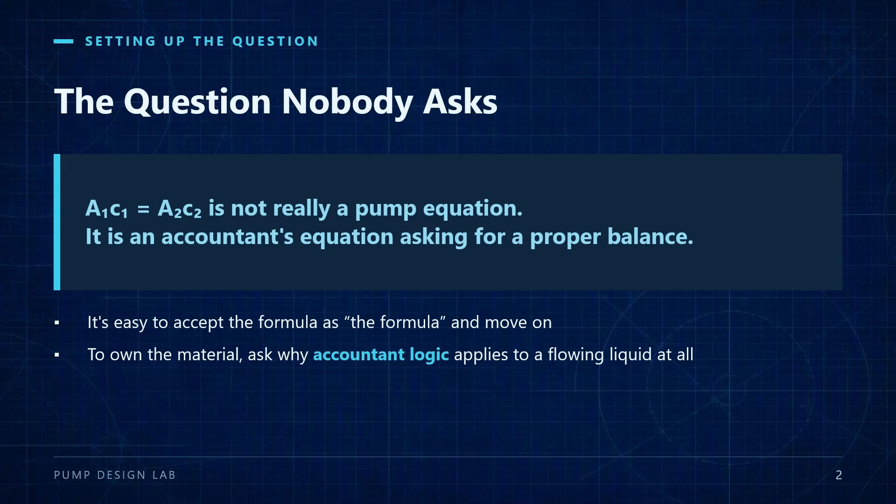It's just a neat way of saying whatever goes into this box must come back out, properly counted. To really own this material, you have to take one step back. You have to understand why accountant logic applies to a flowing liquid in the first place, because fluids don't obey rules just because someone printed them in a textbook.

The ancient rule behind everything. Fluids obey rules because of something much older and much simpler. In this universe, nothing is allowed to simply appear or disappear—not matter, not energy, not motion. If something shows up somewhere, it had to come from somewhere else. If something vanishes from one place, it has to show up somewhere else, maybe in a different form. That's it. That's the core idea behind all of our conservation laws.

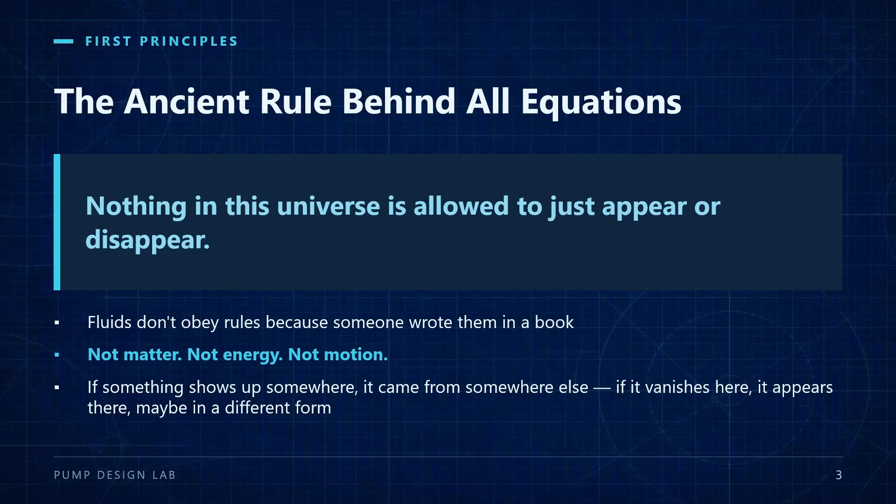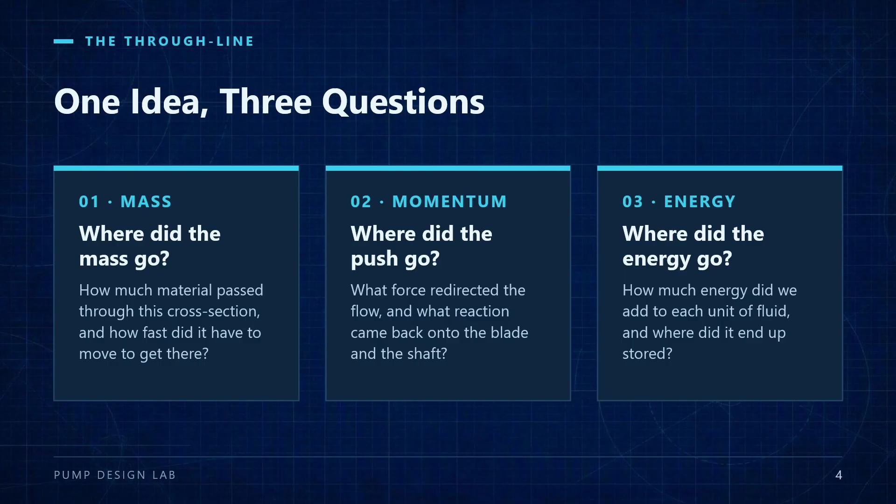Once that idea is really inside your head, the three equations stop feeling like three separate topics. They become the same idea asked three different ways: where did the mass go, where did the push go, where did the energy go? In this episode, we'll walk through each of those questions properly, the way you would explain it to a curious junior engineer sitting at your desk.

Conservation of mass: your gut already knows it. Let's start with the simplest one. Conservation of mass is a law your gut already understands, even if you never called it by name.

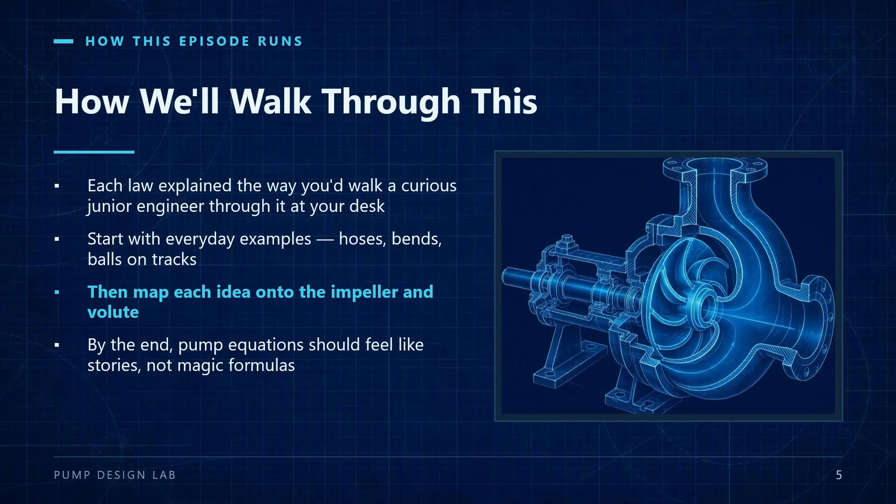Imagine you're standing in the garden with a hose. You put your thumb partly over the opening. Immediately, the water jets out faster. Everyone has seen this since childhood. Very few people stop to ask why it speeds up.

Here's the reason: the amount of water leaving that small gap every second has to equal the amount of water arriving from the tap every second. There's no extra room inside the hose for water to pile up and wait. So when you shrink the exit area, the only way to keep the same amount of water per second is for the water to move faster through the smaller opening.

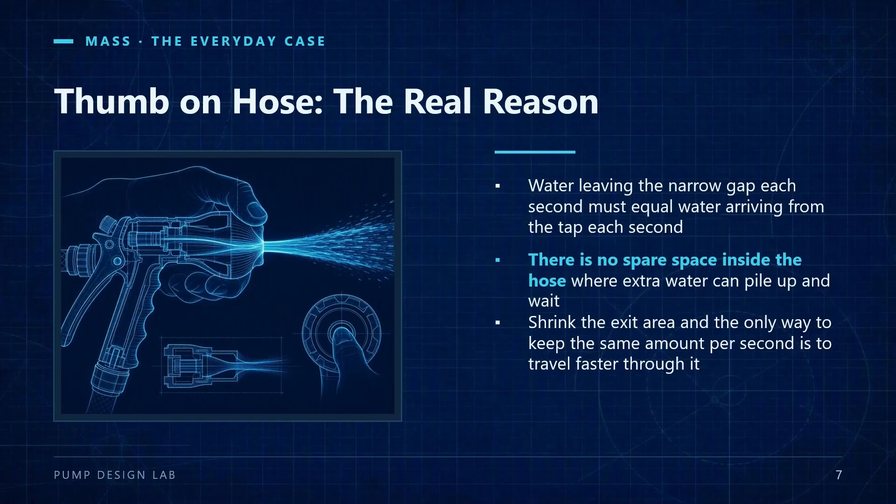That single observation is the entire continuity equation in everyday language: area shrinks, velocity must rise to keep the flow rate constant. It's not some mystical formula. It's just a fluid version of counting buckets per second.

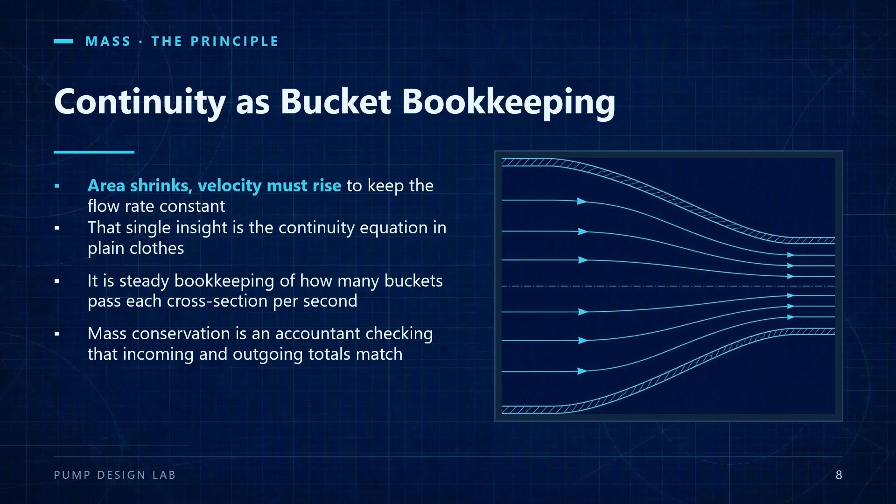Mass conservation inside the impeller. Now take that same idea into a centrifugal pump. Fluid enters the impeller through a relatively large area. From there, it flows into narrower, twisting passages between the blades as it moves outward toward the volute. At every cross-section on that journey, the same rule applies: whatever the area is at that station, the velocity must adjust so that the volumetric flow rate stays the same from section to section.

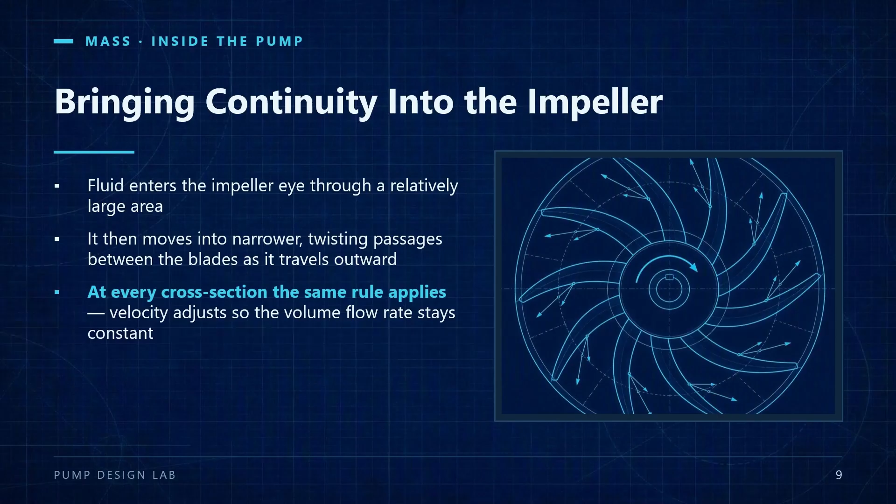For liquids like water, the density is almost constant, so mass flow rate is simply density times area times velocity. For steady, incompressible flow, that product has to be the same at each station. This is why, when you design or analyze an impeller, the very first thing you compute at each radius is velocity from geometry. Before blade angles, before lift or head, you let mass conservation and the passage area tell you how fast the fluid must move there.

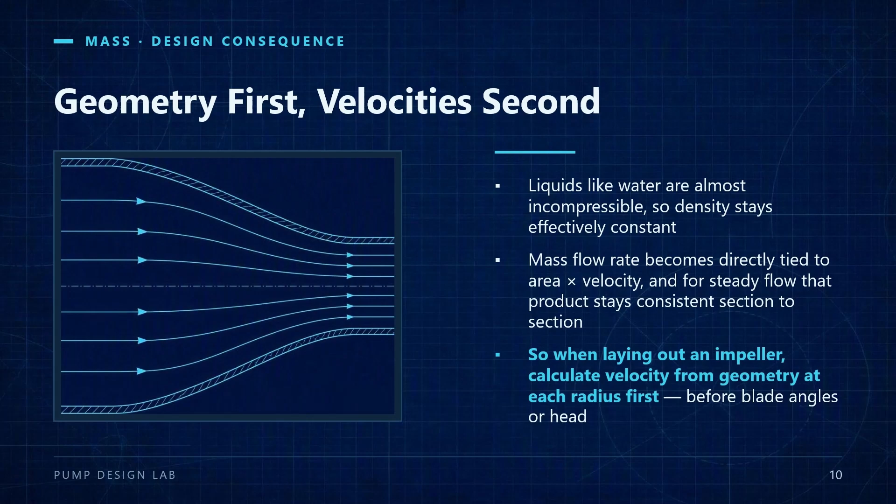Mass conservation doesn't care how hard the blades push or how much head the pump produces. It only asks one question: with this much space available right here, how fast does the fluid have to move to get through?

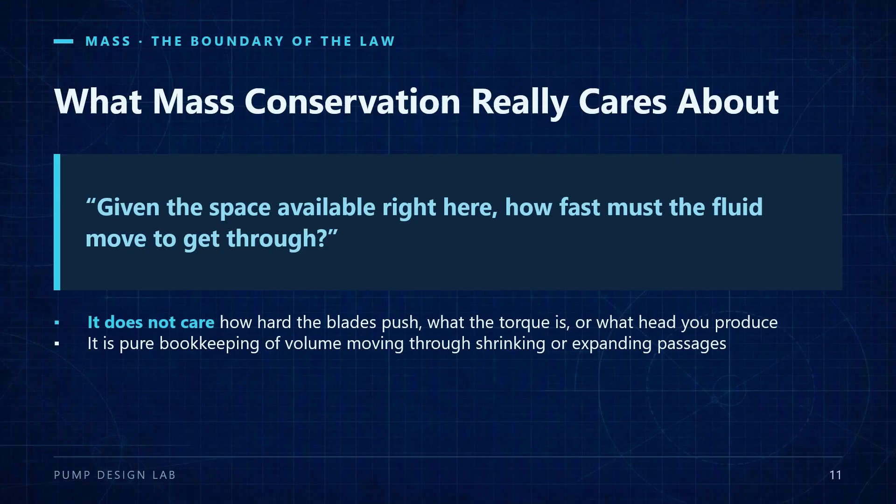Conservation of momentum, where the story gets interesting. Now let's move to conservation of momentum. This is a law most engineers have seen on paper, but often don't feel in their bones.

So we'll build the feeling first. Go back to the hose, but change the situation. This time, bend the hose into an L shape. Turn the water on. You'll notice the hose kicks, tries to straighten, and wants to twist in your hand.

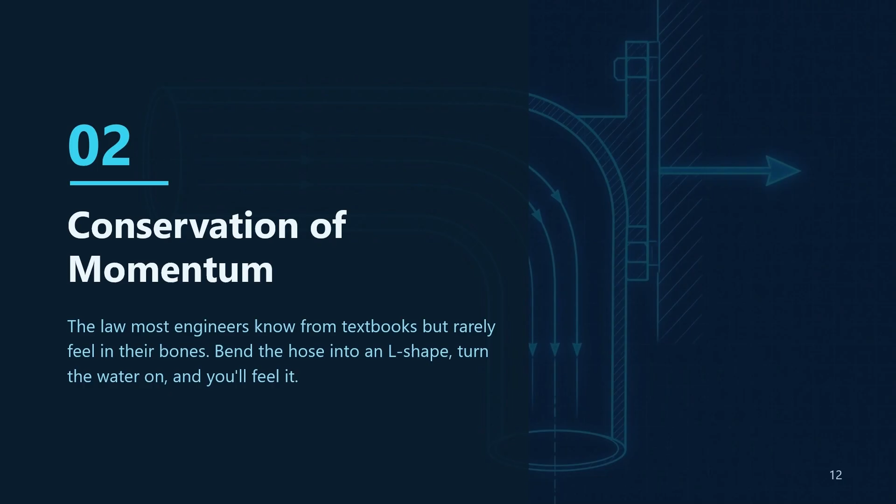Why? The water was traveling in a straight line. The bend forces it to suddenly travel in a different direction. But water doesn't change direction for free, any more than a car mysteriously swerves without a steering input. Something has to push it sideways to make that turn happen. In this case, the pipe wall is doing the pushing. The wall shoves the moving water sideways, forcing it around the bend instead of letting it continue straight.

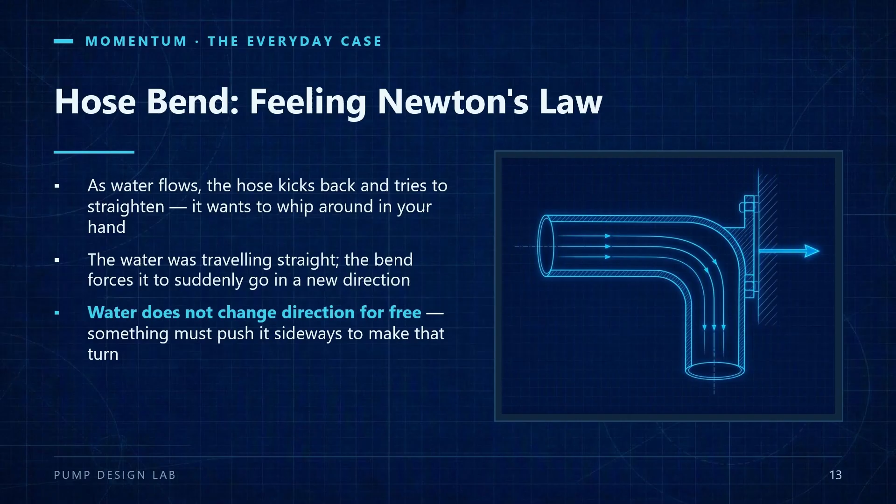And here is Newton hiding in plain sight. If the pipe pushes on the water to bend it, the water pushes back on the pipe just as hard in the opposite direction. That reaction is the kick you feel, not a vague idea of pressure, but a direct physical response to the water's momentum being forced into a new direction.

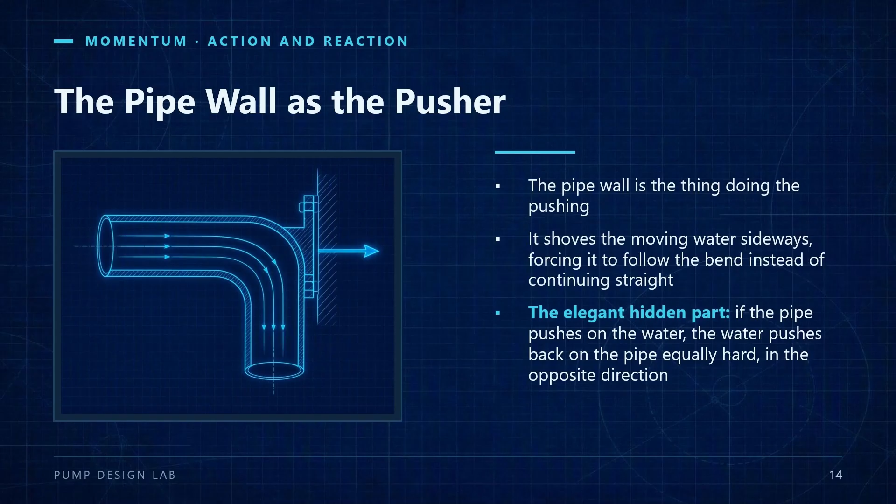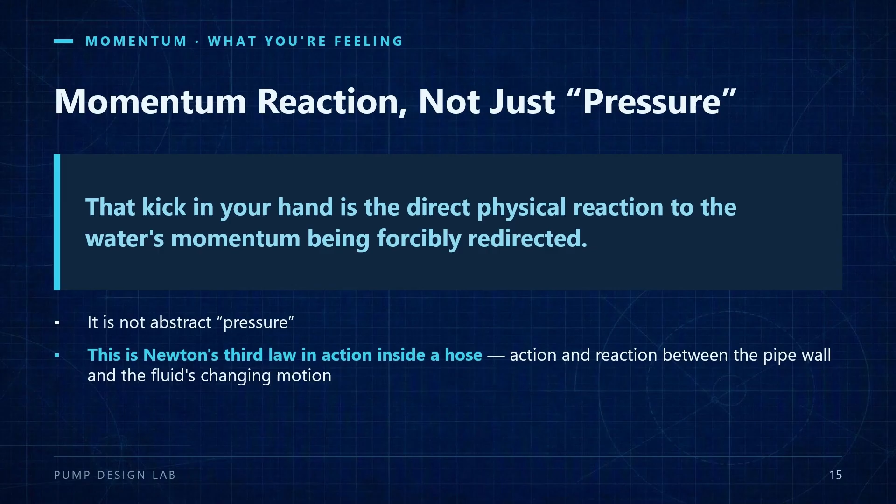Impeller blades as controlled bend. Now hold that picture in your mind and look at an impeller blade. An impeller passage is doing exactly what that pipe bend does, but on purpose, at high speed, and continuously. Fluid enters the blade passage with one relative velocity and angle. We often call that W1. The curved blade surface forces the fluid to leave with a different relative velocity and angle, W2.

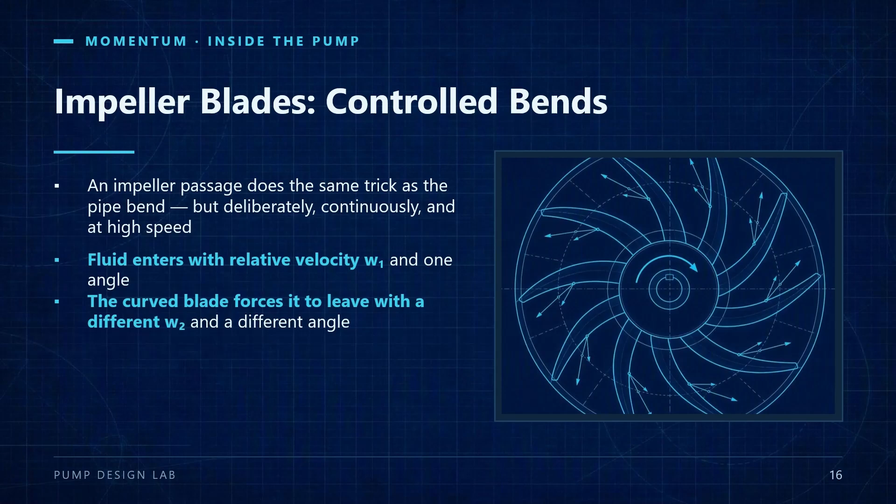To make that change happen, the blade has to push on the fluid, just like the L bend had to push on the water. And again, Newton's third law shows up. The fluid pushes back on the blade with equal and opposite force. That reaction force, acting at the blade radius, creates a torque about the shaft. Torque, combined with rotational speed, is shaft power.

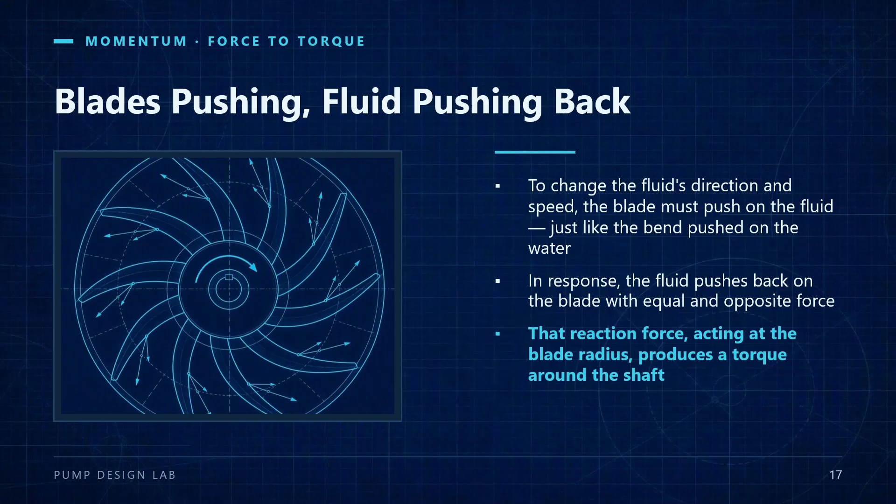So the motor isn't fighting some mysterious resistance. It is fighting the reaction force of billions of tiny fluid particles being bent and accelerated by the blades every single rotation. Conservation of momentum is what connects how we turned and sped up the flow inside the impeller to how much torque and power the shaft must deliver.

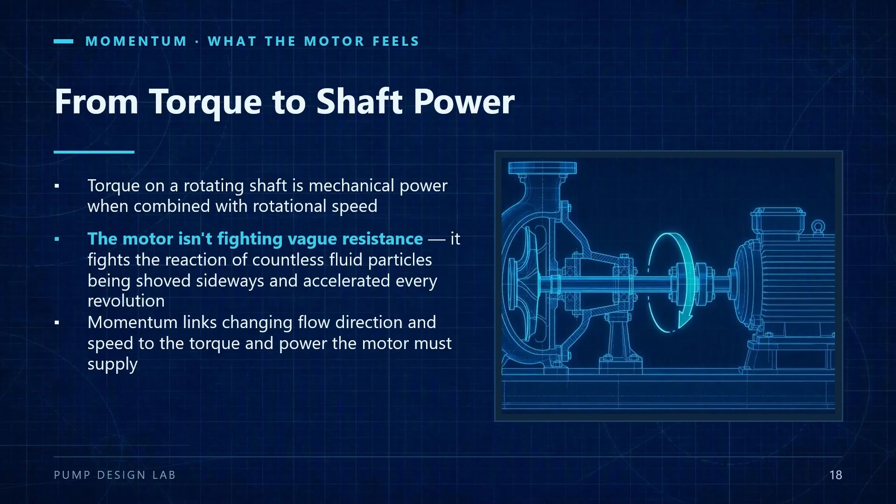Euler's equation in spirit. This momentum redirection story is the physical origin of Euler's pump equation. We won't derive the full formula here, but you can already sense its shape.

Euler's equation simply writes down in mathematical form how much the tangential component of the fluid's velocity changed between inlet and outlet. That tangential change, multiplied by mass flow and radius, gives you the hydraulic torque and the theoretical head the impeller can produce.

So when you look at velocity triangles in a pump textbook, you're not staring at abstract geometry. You're looking at a visual description of how the blades are redirecting fluid momentum and how that redirection turns into torque and head. Conservation of energy, what the pump is actually for.

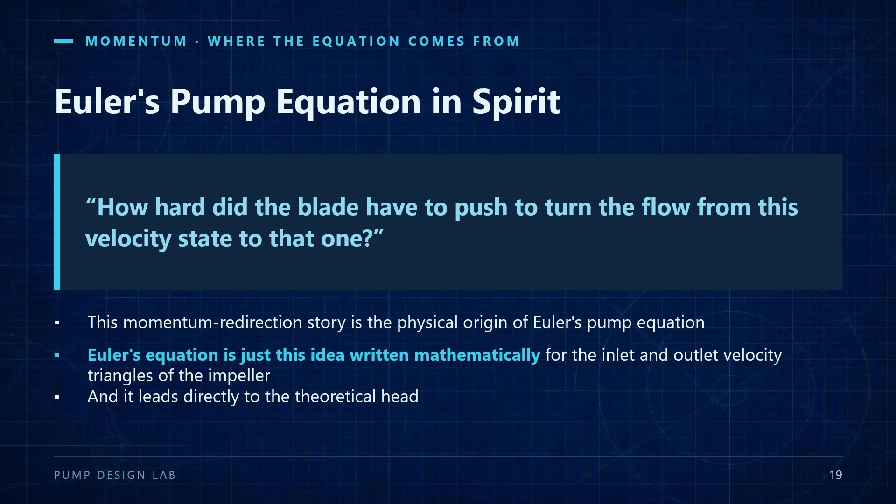Now we come to the third law, conservation of energy. This is the one that matters most to your customer because it eventually shows up as a head versus flow curve on your datasheet. To feel this law, let's first leave fluids and think about a simple mechanical picture.

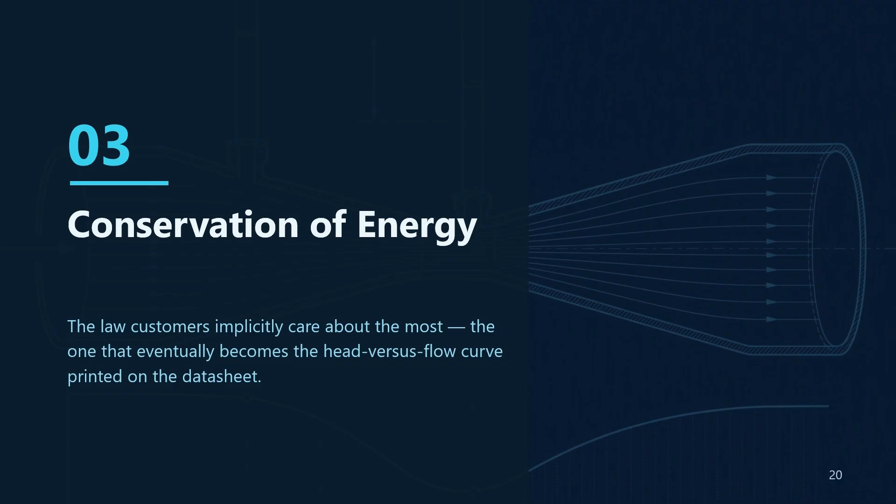Imagine a ball rolling along a smooth, frictionless track. The track dips down into a valley, then rises back up. As the ball rolls down into the valley, it speeds up. As it climbs out of the valley, it slows down. If you calculate its total energy, the energy from its height plus the energy from its speed, that total never changes anywhere along the track. Height energy turns into speed energy and back again, but nothing is created and nothing is lost.

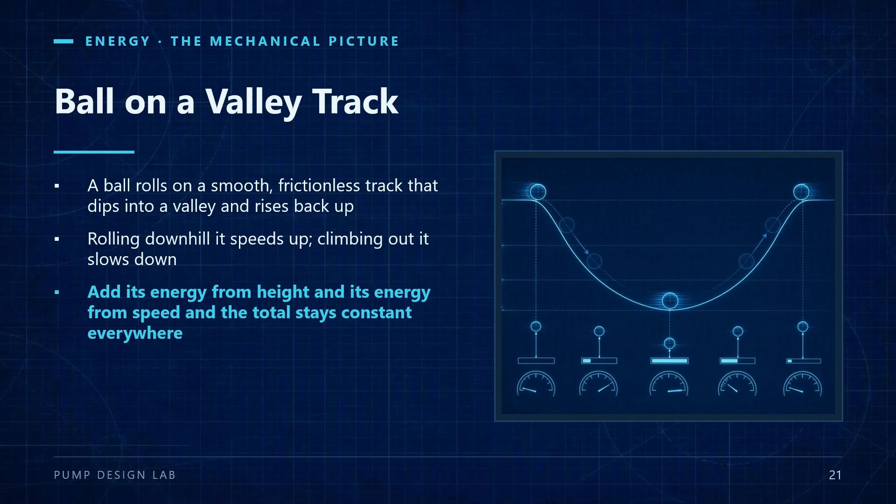Fluids and their three energy forms. Fluids do the same kind of trade-off, but they have three forms of energy instead of two. A flowing liquid can store energy as pressure by being compressed or squeezed. It can store energy as velocity by moving faster. And it can store energy as elevation by sitting higher in a gravity field.

Bernoulli's equation is just a statement that, for an ideal, frictionless flow along a streamline, the sum of those three energies stays constant. Pressure energy plus velocity energy plus elevation energy is fixed, just like the ball's combined height and speed energy.

That's why, in a simple pipe without a pump, if the fluid speeds up into a narrower section, the pressure must drop. The total energy per unit weight is fixed, so if one term increases, another must give back.

Why high velocity means low pressure. So if you squeeze a fluid through a narrow throat and its velocity rises, something has to pay for that rise. Because the total energy budget stays constant, the pressure at the throat has to fall.

This is the whole secret behind a Venturi meter. It's also why, inside a volute or nozzle, you often measure a local pressure drop exactly where the velocity peaks. The fluid is trading pressure energy for velocity energy while keeping the total balance.

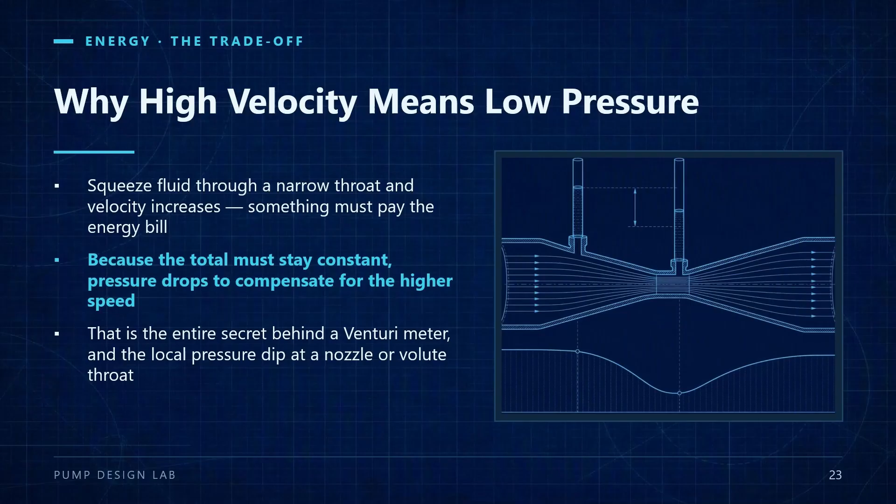What a pump does to energy. Now here is the crucial sentence that ties our whole episode together. A centrifugal pump exists, fundamentally, to break this energy-stays-constant rule on purpose.

If you only had fluid and pipes, Bernoulli would tell you the total energy stays the same, minus friction. But when you add a pump, you add an external source of mechanical energy.

The motor turns the shaft. The shaft turns the impeller. The impeller does work on the fluid by bending and accelerating it. That's the momentum change we just talked about.

Because of that work, the fluid leaves the pump with more total energy per unit weight than it had when it arrived. That increase in total energy per unit weight is what we call head.

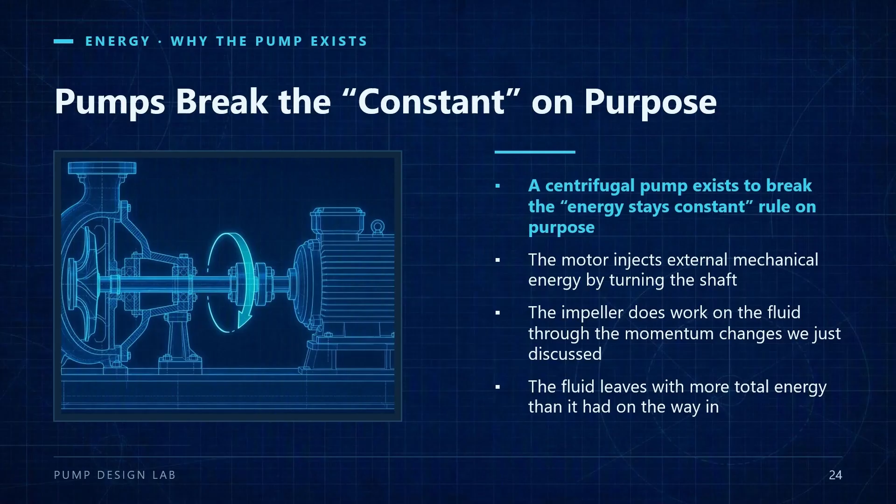Head as energy per unit weight. Head is not a mysterious pump word. It is just a convenient way of saying, this is how much energy we added to each unit of fluid, expressed in meters, so that we don't have to constantly mention density.

When you read a pump curve that says 30 meters of head at this flow rate, it is telling you the energy story. At that operating point, the pump adds enough energy per unit weight to raise the fluid by an equivalent of 30 meters, or to create an equivalent pressure rise, plus whatever is needed to overcome friction in the system. So in energy language, a pump is simply an energy-adding device.

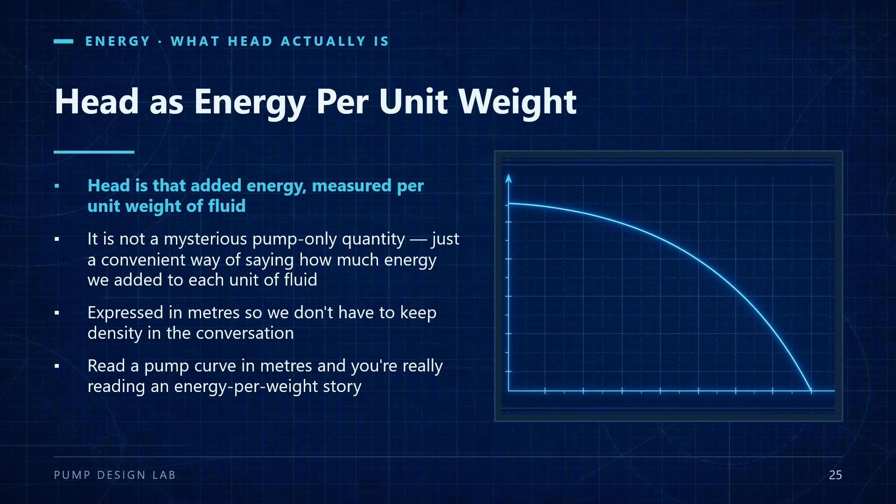Mass conservation tells you how much flows through. Momentum conservation tells you the forces and torque involved. Energy conservation tells you how much useful push you ended up giving the fluid.

Putting all three together. Now let's tie the three laws together in one clear picture. Mass conservation tells you the velocities at each point purely from geometry and flow rate. How fast is the fluid moving here, given this passage area?

Momentum conservation tells you the forces on the fluid and the reaction forces on the blades and casing. How hard do we have to shove this fluid to bend and accelerate it this way?

Energy conservation tells you the head and the useful outcome for the system. How much energy do we actually manage to add to each unit of fluid?

You cannot answer all three questions using only one law. You genuinely need all three applied together to go from this is our blade shape and impeller geometry to this is the head, flow curve, and power draw this pump will produce.

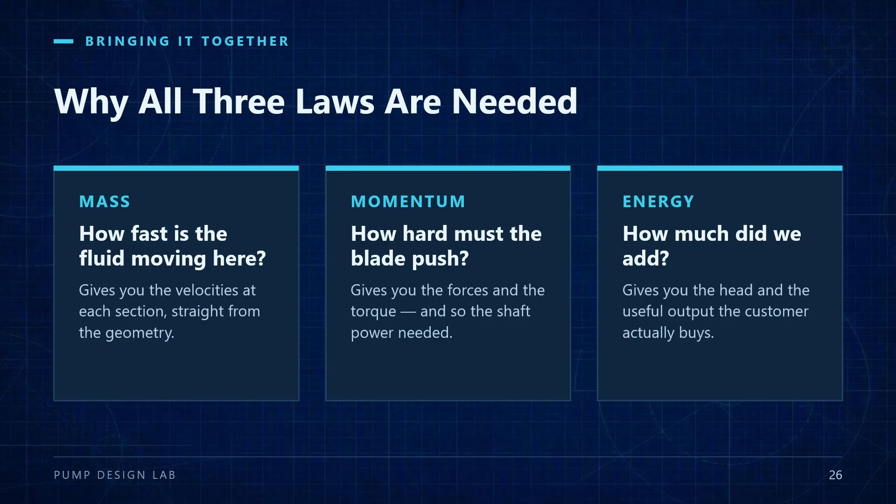In classical pump theory, the link looks like this. Geometry and continuity give you the velocity triangles at inlet and outlet. Momentum conservation applied to those triangles gives you Euler's equation and the theoretical head.

Energy conservation plus losses converts that theoretical head into a real pump curve that you can compare with test data and sell to a customer.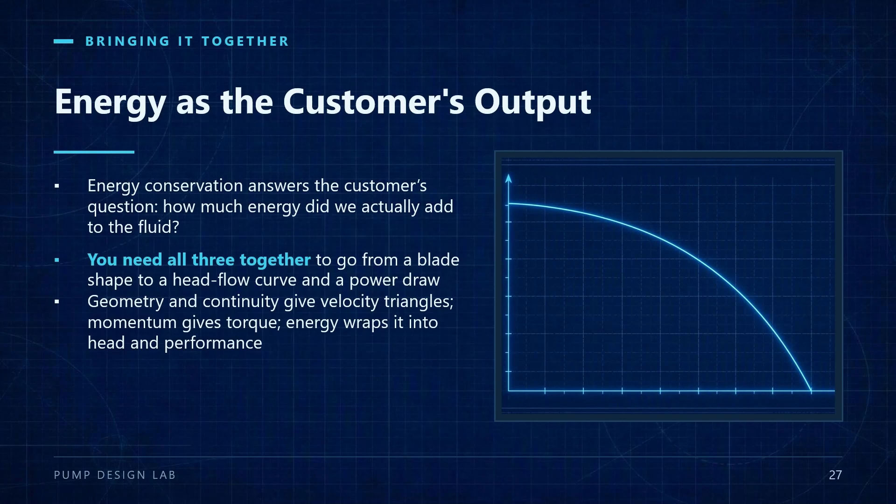Closing for the episode. Before you rush into formulas or CFD, take a moment to sit with this story. Mass is about how much goes through. Momentum is about how hard we shove it. Energy is about how much useful push we finally give the fluid.

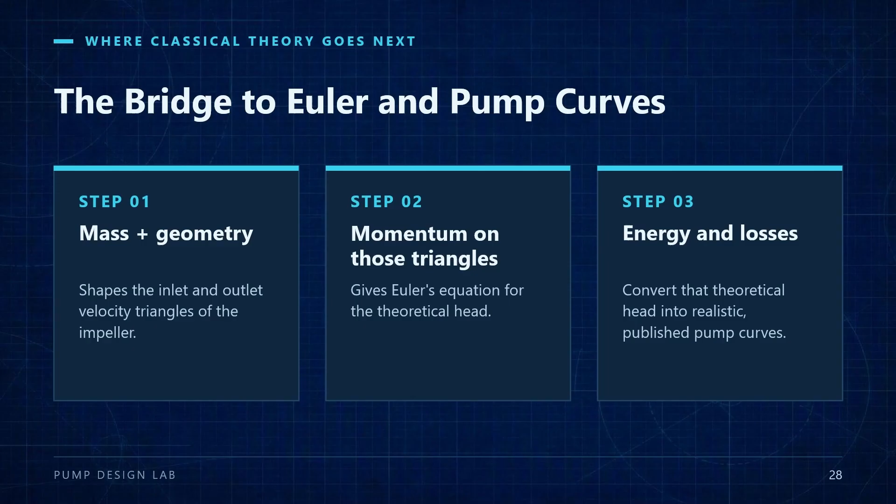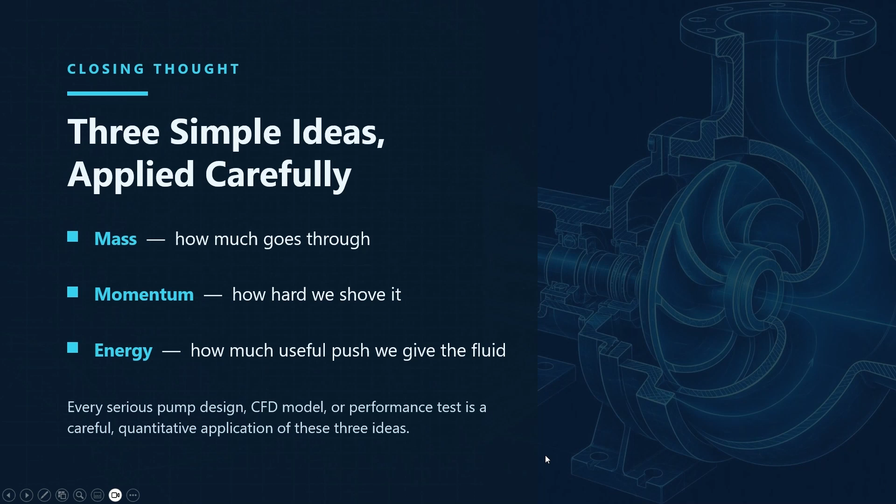Every serious pump design, performance prediction, and CFD model is just a careful numerical application of these three simple ideas. In the next episode, we'll build directly on this foundation and walk into the velocity triangles and Euler's turbomachinery equation, step by step, so you can see exactly how these conservation laws turn into real pump head.